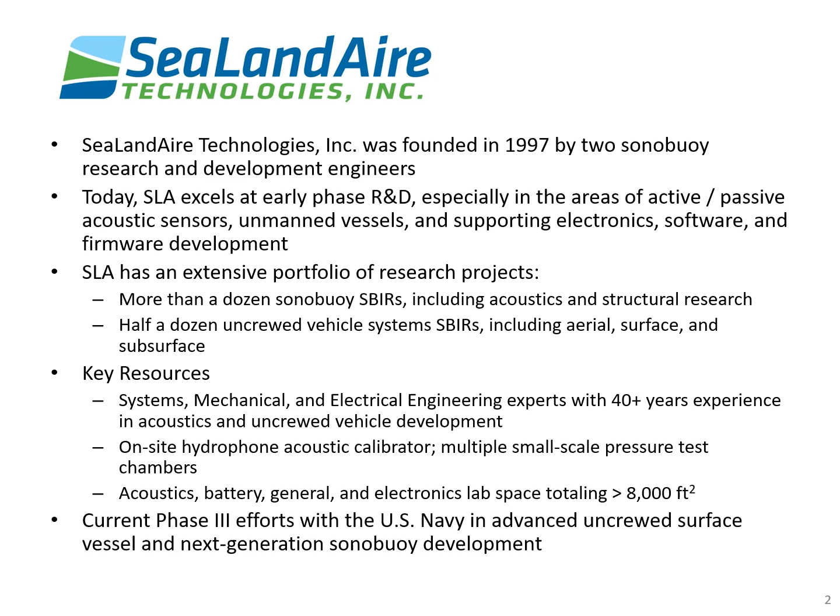All of this experience has contributed to SeaLandAire's reputation for solving challenging problems and enabling the collection of data from difficult environments. Our mechanical, electrical, transducer, and systems engineering teams work cross-functionally on the wide range of our projects, and our lab technicians are aligned under these engineering disciplines to support the building and testing of our solutions. So now that you know a little about SeaLandAire and our capabilities, let's discuss the Navy challenge. Where is the opportunity for improvement to allow our naval forces to perform even better?

For some time now, the Navy has deployed sonobuoys from maritime patrol aircraft, also called multi-mission aircraft, or MMAs. These MMAs benefit by maximizing time spent at a high cruising altitude, both in terms of fuel and airframe longevity. Current production sonobuoys descend from their release point at a fixed rate. Therefore, as the altitude of release point increases, so does the time it takes for the sonobuoy to reach the water. This time is also known as time to splash.

In parallel with this, as the sonobuoy spends more time in the air, it is more exposed to various winds, which would cause it to translate from its intended drop location. Therefore, when the sonobuoy is dropped from high altitude, it will not only take longer to reach the water, but it will also be more inaccurate. While there are steps that can be taken by the aircraft to minimize these issues, the most ideal solution is to improve the sonobuoy itself, such that it will be able to independently minimize the consequences of high altitude sonobuoy deployments. Now, what is the solution to this challenge? PHASE.

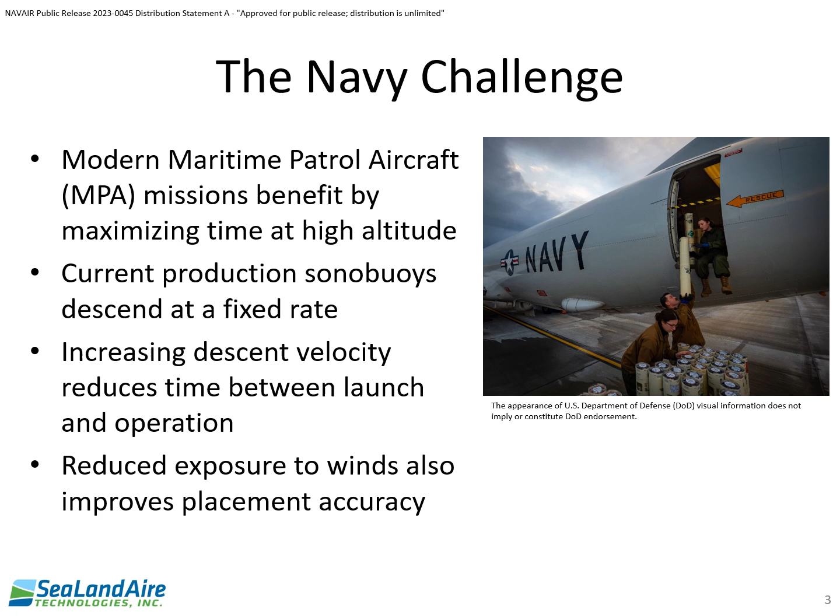Now, to date, PHASE airdrop testing has validated significant improvement in time to splash and accuracy. From 15,000 foot altitude, PHASE-equipped heavy sonobuoys are seeing 50% reduction in time to splash, while light sonobuoys are seeing 40% reduction in time to splash compared to that of their legacy variant. As discussed earlier, a consequence of reaching the water quicker is that the sonobuoys can also be dropped more accurately. From 7,000 foot altitude, we have seen 39 meter circular error probability for heavy sonobuoys and 21 meter circular error probability for light sonobuoys. This means that when a certain number of sonobuoys are dropped from 7,000 feet and aimed at a position of importance, 50% of those buoys will be within 39 meters or 21 meters of that target.

So what platforms are meant to benefit from this system? Well, currently, it is meant to benefit the AN/SSQ-62 and AN/SSQ-53 sonobuoys, also called DICASS and DIFAR sonobuoys respectively, as they have been identified as the platforms of highest priority to benefit from PHASE. However, we at SeaLandAire believe it could be modified for other sonobuoys and/or any parachute-based air deployable system in which time to splash or placement accuracy is critical.

Beyond the benefits provided to the mission objective, PHASE also provides benefit to the multi-mission aircraft itself, allowing the aircraft to remain at cruising altitude during sonobuoy deployment missions, reducing stresses on the airframe and prolonging the life of the aircraft overall.

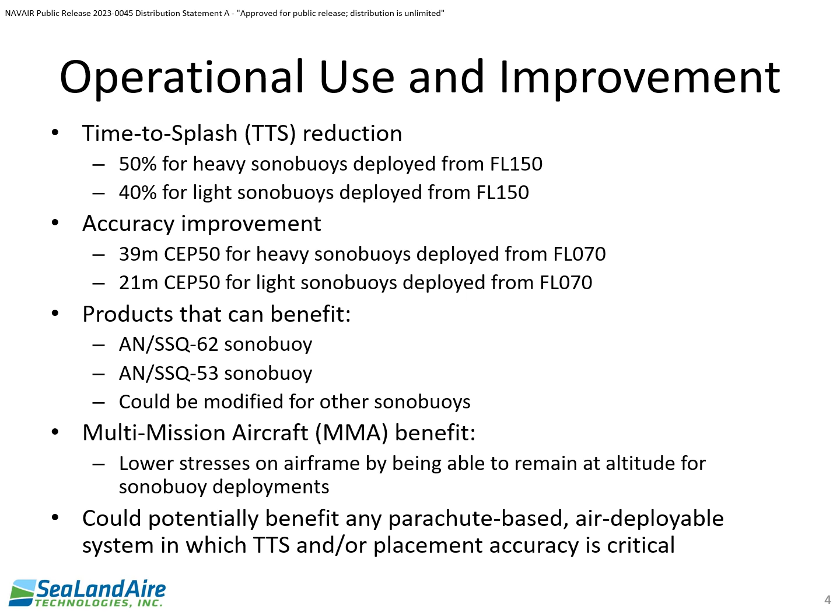Since the inception of PHASE, 3 key performance objectives have remained the focus of the SeaLandAire development team: safe separation from the aircraft, stable high velocity descent, and a safe water impact. To accomplish these objectives, PHASE utilizes a parachute staging system, which is described in the graphic on the right.

Upon release from the aircraft, a PHASE-equipped sonobuoy behaves identically to a legacy sonobuoy. The wind flap ejects and the parachute deploys, allowing the sonobuoy to horizontally decelerate and stabilize before beginning its vertical descent. After the sonobuoy stabilizes, though, PHASE-equipped sonobuoys and legacy sonobuoys behave differently, as the parachute is then reefed by extending 2 of the 4 parachute shroud lines, turning a once-billowing parachute into a streamer.

This significantly reduces the drag in the system, allowing the sonobuoy to fall at a much higher speed. Once the sonobuoy reaches a prescribed altitude, the other two shroud lines extend, causing the parachute to reinflate, which decelerates the sonobuoy, allowing it to safely splash into the water.

In order to facilitate these transitions and manage the staging, a low-cost standalone printed circuit board, or PCB, is integrated into the system, acting as the brain of the PHASE staging sequence. This PCB not only manages the staging sequence, but also prevents staging should the buoy be dropped from a low altitude. Finally, PHASE was designed to match the existing legacy sonobuoy form factor, and all added components required for PHASE fit seamlessly into the current A-size legacy buoy.

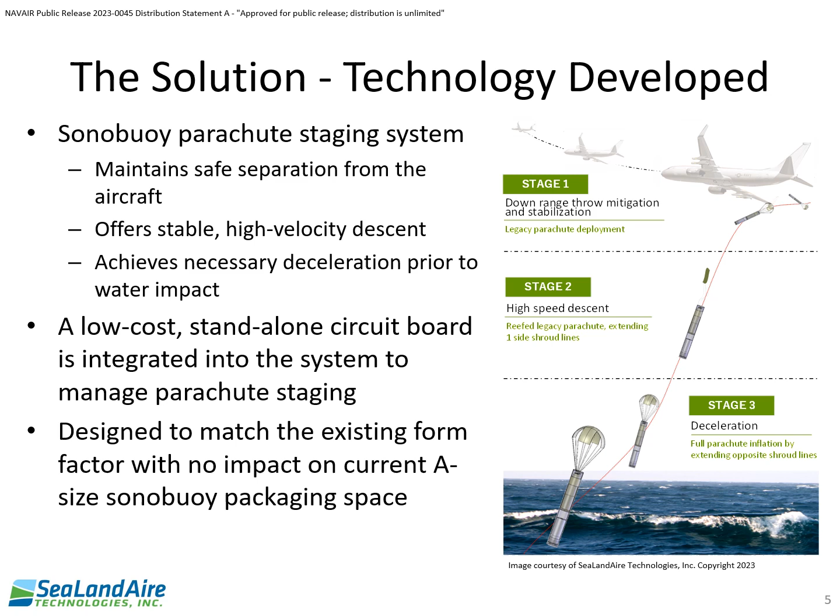PHASE is currently under development in a Phase 2.5 contract that is set to complete in the second quarter of fiscal year 2024. There are 4 primary goals of this 2-year contract. The first goal is to prove the reliability of the PHASE system when integrated into production sonobuoys, and collect ballistics data to feed aircraft software.

The most recent airdrop revealed a 75% success rate, which is the highest seen since the PHASE system has been introduced to the more vigorous flight environments of multi-mission aircraft. SeaLandAire believes that achieving near 100% reliability before the end of this contract is well within reach, and the majority of our efforts will be put towards accomplishing this goal. In parallel to the reliability effort, the airdrops have allowed the PHASE team to collect aerodynamic ballistics information of PHASE-equipped sonobuoys that will eventually feed multi-mission aircraft software.

The second goal is to evaluate the price of a PHASE module, in order to shed light on the additional costs that would be required to procure PHASE-equipped sonobuoys. To accomplish this, SeaLandAire has partnered with a prime sonobuoy manufacturer to conduct a cost assessment of the PHASE module and determine the cost delta between a legacy sonobuoy and a PHASE-equipped sonobuoy.

The third goal is to investigate the PHASE system as it relates to hazards of electromagnetic radiation to ordnance, or HERO. In this contract, a HERO test will be conducted to determine where the specific areas of susceptibility are and potentially follow by integrating HERO countermeasures.

The fourth and final goal of this contract is to draft and deliver proposed updates to the production sonobuoy specification, or PSS, that will accommodate PHASE-equipped sonobuoys. These changes focus specifically on PHASE decelerator specifications, including geometry, drag area, and ballistic coefficient, as well as staging definition and altitude limits.

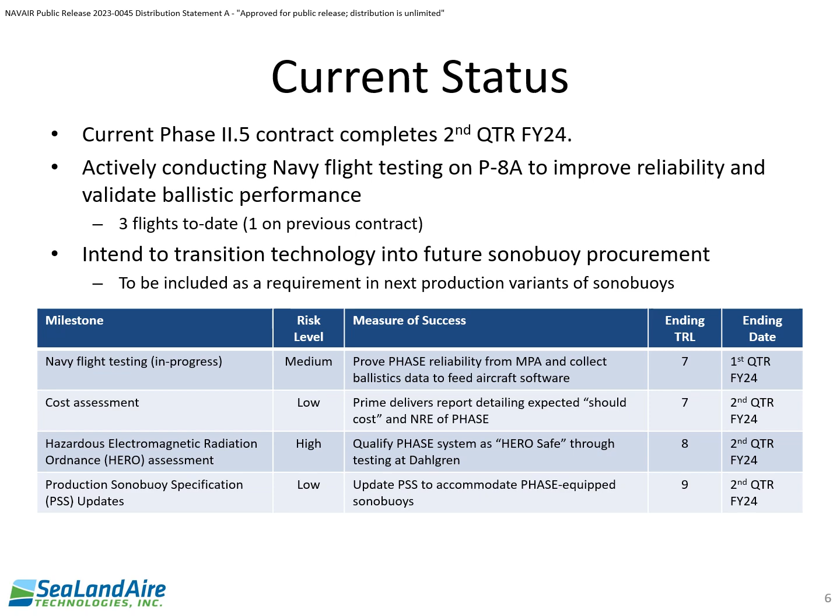The key features and advantages of PHASE can be summed under one statement: added performance capability with negligible impact on current sonobuoy size, weight, and power. This means a product that will improve Navy capabilities without added stipulation to current sonobuoy storage, handling, and usage.

Coupled with the performance benefits are negligible effects on sonobuoy size, weight, and power. As previously discussed, PHASE was designed to seamlessly integrate into the A-size sonobuoy form factor. In other words, when packaged, a PHASE-equipped sonobuoy and a legacy sonobuoy are identical.

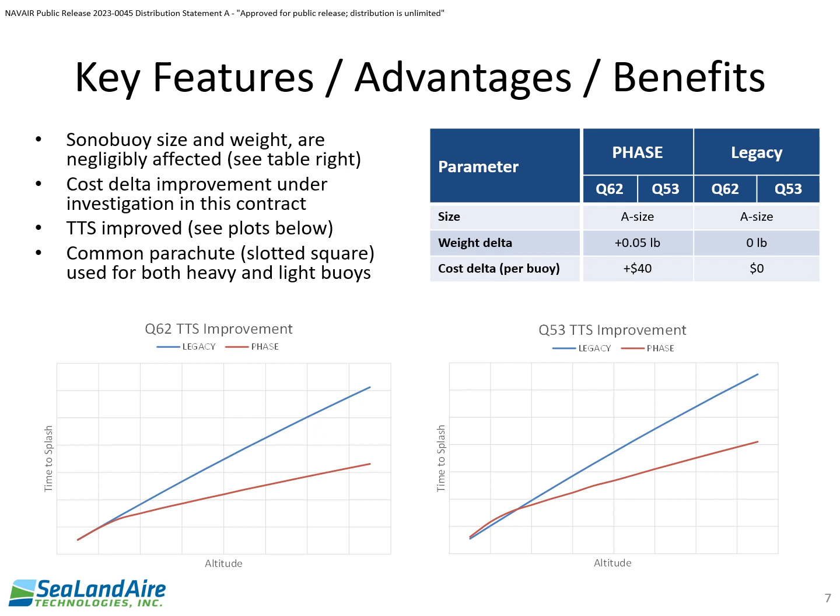On top of that, they weigh virtually the same, with a weight difference that is on the order of grams. Additionally, a focus was maintained to pursue solutions via simple, low-cost parts and assemblies, thus minimizing the cost to purchase and produce. Therefore, the current cost delta estimate between a phase-equipped sonobuoy and a legacy sonobuoy is at a modest $40 difference, though further clarity is still to be obtained on this subject.

With phase being in the latter readiness level stages, the goals of the current contract and goals to transition to the fleet are the same. As mentioned previously, there are 4 primary goals SeaLandAir is striving towards. First, we are working to prove out the reliability of the technology when deployed from an MPA platform. Secondly, we are working with a prime contractor to perform assessments and to develop recommendations for cost reduction to ensure minimal impact to current acquisition programs for these expendable devices.

Third, we intend to conduct a HERO evaluation and, if time allows, adjust the design to qualify the phase module as HERO safe. And fourth, we intend to draft and deliver recommended updates to the PSS in order to smooth phase integration into the fleet. Our primary advocate in this work is the Naval Air Warfare Center Aircraft Division, or NAWCAD's, PMA 264 and PMA 290 offices. As mentioned earlier, subject to funding availability and Navy warfighter requirements, we anticipate completion of these goals as early as the second quarter of fiscal year 2024.

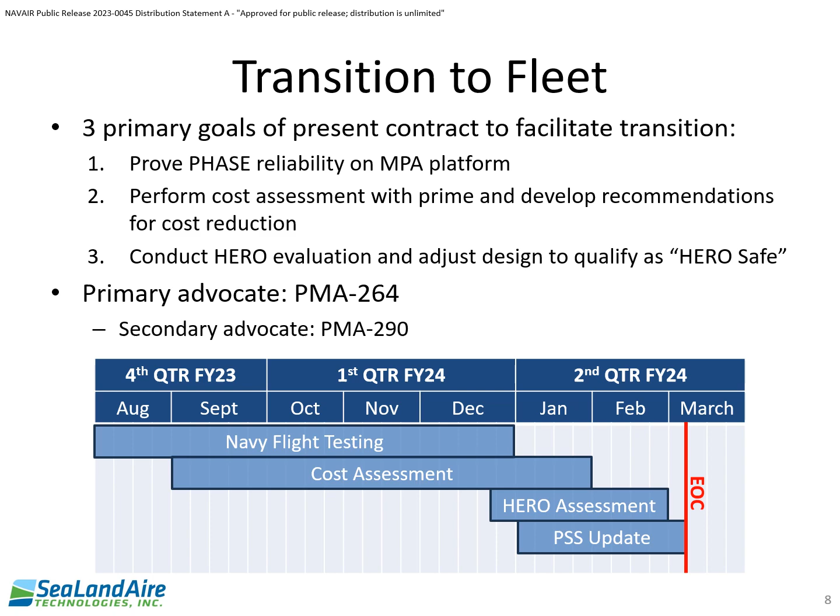The present SeaLandAir market analysis indicates that sonobuoy prime manufacturers are focused on producing units to spec while maintaining adequate profitability. The primary driver for SeaLandAir is to maintain a strong relationship with NAWCAD and continue to work toward adding phase to the PSS and subsequently included in future production manufacturing of DICASS and DIFAR sonobuoys. Additionally, it is believed that phase could be incorporated into any NavAir sonobuoy or air-released asset. Beyond NavAir capabilities, we believe this technology would also be beneficial for other military airdrop applications, including airborne logistics, search and rescue, and humanitarian aid delivery.

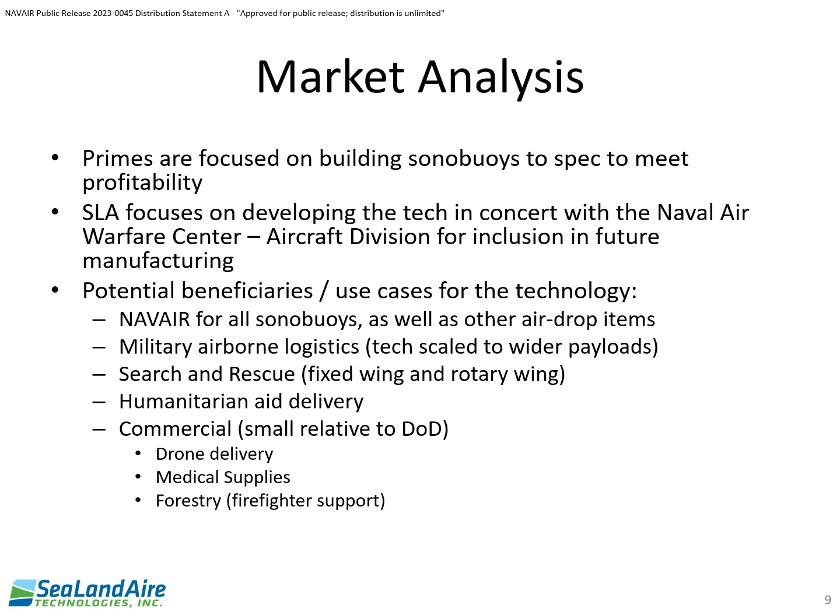Imagine soldiers hiding in high-risk war zones with little to no option of leaving shelter, and airdropped care packages can be delivered from high altitude with minimal detection. Or maybe towns and villages receiving aid from high-altitude aircraft with no alert to oppressing governing bodies. Phase would allow for airdropped packages to be delivered in stealth with speed and accuracy. Outside of military applications, phase could also be incorporated into commercial applications such as drone deliveries, medical supply delivery, and firefighter support. Commercialization beyond the sonobuoy industry will be SLA's focus once full incorporation by prime manufacturing partners for NavAir sonobuoys is complete.

The transition plan for the phase module technology is principally targeted towards sonobuoy applications. Phase-equipped sonobuoys are currently undergoing testing from MPA platforms to validate the reliability of the system and collect valuable ballistic information. Following this testing, NavAir will add a specification for the phase-equipped sonobuoys to the production sonobuoy spec. It is anticipated that this process will be executed smoothly, as drafts of this spec change have already been developed between the SeaLandAir and PMA-264 teams. With the reliability of the design validated and a spec change in place, phase-equipped sonobuoys can then be ordered and procured for Navy use.

The plan for secondary applications begins with research and consultation into how phase can be scaled for use in larger applications and transferred to manufacturers. With the concept and goal of this technology to primarily benefit military defense applications, it is expected that a comprehensive transition evaluation will be required to grease the skids on a technology transfer to the public sector. As can be expected, any technology instructions or training documents will be evaluated throughout the transition.

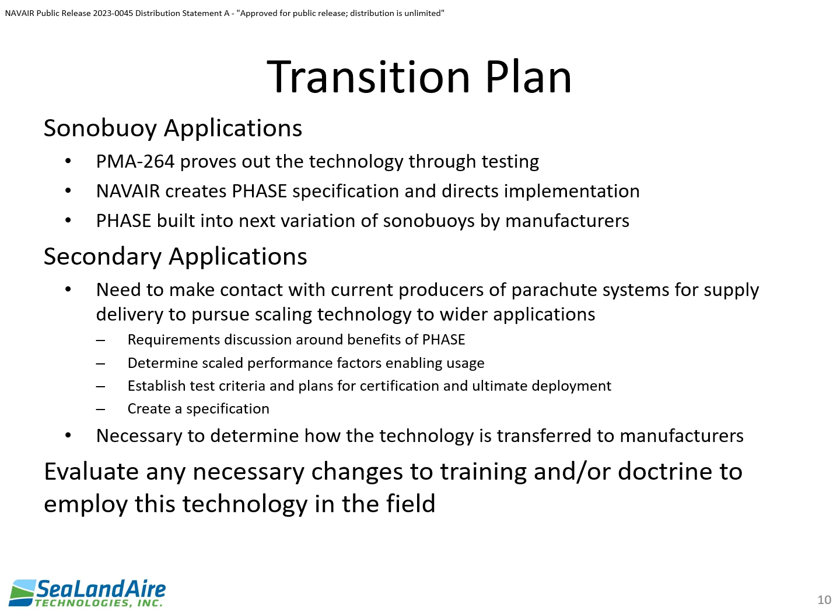Well, thank you for taking the time to listen to this presentation today. I hope that you have gained a better understanding of the phase program on what it is, where it's going, and what it's capable of.